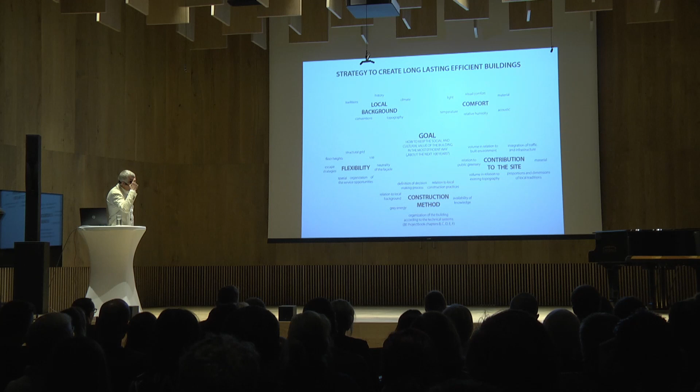The next is contribution to the site, which is also extremely important, because we don't believe, as is often done, that a project should only focus on its own success without considering that you need to bring value and benefit to the environment. If you don't do that, you will fail also with the project.

You need this contribution to the site, and that means architecture is not only design of objects, material, and volumes — it's much more. It's designing of relations. That's the very important thing.

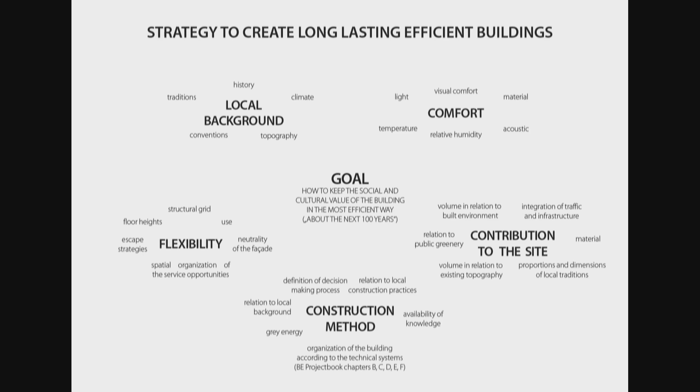Another thing about efficient buildings is the construction method, which means we have to think not only which materials we use and how we do it, but what knowledge we have on site, and what can we do regarding grey energy, which is an issue not considered in any norms in Europe at the moment.

I'll come back to grey energy later — what is meant by that is at least 13% of the life cycle of a building is influenced by the construction method and the use of materials, and its relation to the local background.

What is very important too is that it's not only about material and design — how the decision-making process is defined and how you reach a certain goal matters too. Nowadays things are getting more complicated because more authorities and more people are involved in the procedure, and you need to integrate them well to complete the process.

That's about efficient buildings. Now, how can we do buildings with low operating costs? What do we have to consider? How to reduce primary energy demand and CO2?

First, we have to look at the climate and design our building according to local circumstances. What we try to do is develop our buildings always in relation to climate factors on site first, and then to building optimization parts like window-wall ratio and operable windows.

These are all factors which will influence the efficiency of the building. These are more technical factors you can see here, the technical systems. They are only one small part, energy distribution and energy conservation. Technical systems are one part of this.

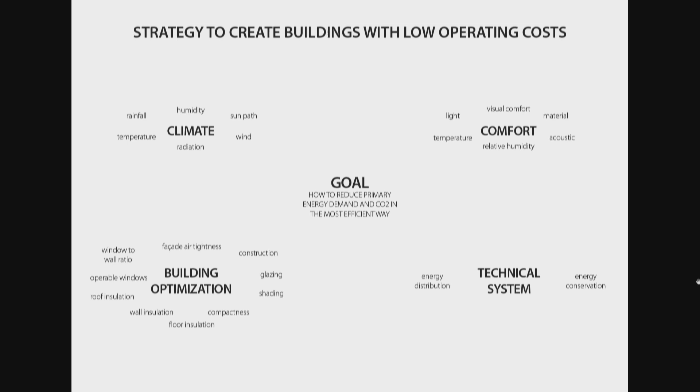We don't think that the technical equipment of a building will solve the problem of reducing CO2 emission for the future. We don't think so. And once more, comfort is one of the factors which will influence achieving this goal. Now, I'm coming to the examples.

Contribution to public space, that stands for the 200 years issue. Structure means our building needs to sustain at least 100 years structurally. The building envelope has an average lifetime of 50 years, the function about 20 years, and the surfaces, meaning decoration and things like that, about 10 years. I will illustrate that with the next slides.

When we approach a project, that's one of the first things we try to face: how can we implement our building in the best way to create not only these issues, but also a certain relation between the different parts which already exist, so we can get that value-added project in the end.

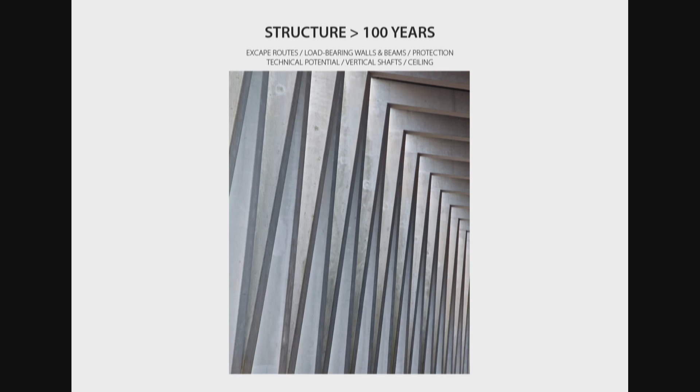The second is to look at the structure, which means we need to find ways to organize the escape routes, the load-bearing systems like walls and beams. We need to look at protection, the technical potential, meaning the flexibility of the structure, the vertical distribution, and ceiling heights. There we can define the ability of the building to bear different functions.

If we do that in a structure in a good way right from the start, thinking it's not only there to be a residential house, but it can also be a commercial house, or a kind of church, a religious place, then we think a little bit different than if it's only housing where we just say, okay, clear height 2.50 and it's done. We have to face that we should go a little further than that.

Next thing is building envelope, 50 years: roof, windows, shading systems, and materials which we use outside. But the building envelope is also influenced by the technology we use inside the building. We have a method within our office for how we work on projects right from the beginning. One is that in combination with the facade and the expression of the building, we think about how we use the technique inside, because these two things are in a very strong relation to each other.

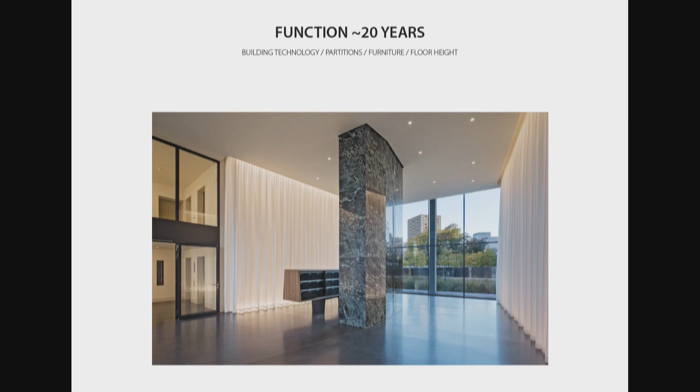Next thing, function, 20 years. Probably it's a little exaggerated, but our experience is that the life conceptions of the users are changing quite dramatically already nowadays, changing every 5 years. We are strongly influenced by a very fast communication between ourselves now, and I think this is a very important fact.

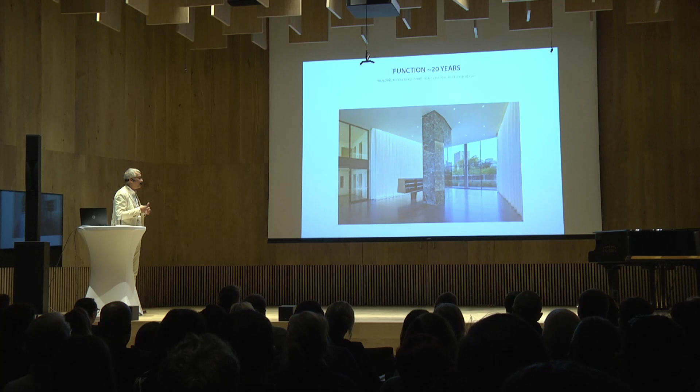What we can also see is that it's necessary that functions could be changed, even if it's not absolutely something we have to see or want, but it's a fact which happens. In old buildings we investigated, that's learning from the past, we could see that when we look through their lifetime, at least they changed their function 3 or 4 times. It was not only residential, or it was residential in different forms. We have to look at this, that we can work with this issue much more than was done in the past—that means flexibility and a certain neutrality regarding the buildings.

And surfaces, that's the last part: decoration, walls, lighting, floors, atmosphere, everything which creates atmosphere within the building, and doors. These probably have a much shorter lifetime. In the best case, the lifetime of these used materials is longer.

Now I'm coming to the first part. You remember when I spoke about long-lasting settlements and densifying. We think long-lasting settlements are nowadays a question of best use of the building land we have, and how we can create a better optimized use of square meters per capita.

Second is the volume in relation to the built environment. We need to think that our project is not like an autistic object. That's something we see very often in architecture nowadays, and we don't like that. We think it should look nice, it needs to be a beautiful building, but that doesn't mean it cries louder than the others. We need to set it in dialogue—that's a very important thing in architecture.

Public transportation and infrastructure, which is already mostly there, not only in villages but also in towns—we have to use the infrastructure we already have in the best way. If we extend it everywhere, it's like a cancer. We have to look at how we can limit things and use what we already have in the best way.

Now I'm coming to the first example. This relates to the aspect of density—it's a project built on the former Renault factory area in Paris. The client calls this building Ardéko, even though we don't see any Art Deco language in it—but he liked the project and wanted to give it that name. The interesting thing is, first, it has a very high density.

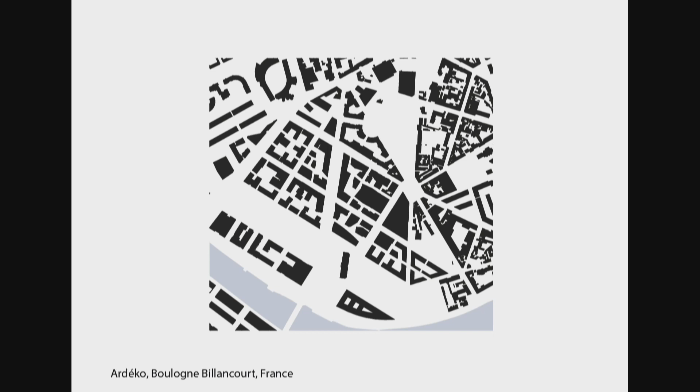In former times this whole area was the Renault factory, and now it's been turned into a master plan by Patrick Chavannes, into a residential area. Our project is located here—we were invited to a competition and designed this slightly strange shape, which results from different requirements of the master plan by Patrick Chavannes.

One requirement was a big boulevard. Second, he wanted a clear possibility to walk through—transparency, not only here but also here, meaning big gates so you can walk through. He wanted transparency and walkability within the quarter, and other rules which resulted in a very strange shape within the building itself.

But the important thing when I look at this plan is, first, it's part of the city.

It's part of the city of Paris. And that's what we learned. We looked at Paris, and then we tried also to use the language, the material, and a little bit of the spirit we caught in Paris, and what we did is extremely well accepted. Paris is one of the most visited cities in the world. And why? Because there is a certain relation from the building to the public space.

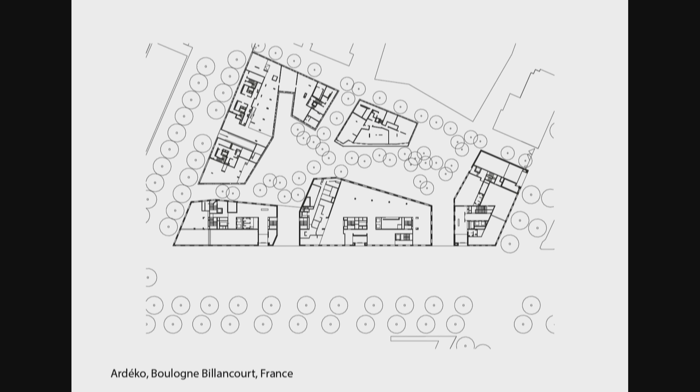Not only that, it's also the material and the expression of the buildings. If you look at the buildings, not every building speaks in a different language. They are made in a homogeneous way, done with the same material, with slight differences between the different buildings. And they have a common use of commercial areas on the ground floor. This is one of the things which was very interesting.

This wasn't proposed by us; it's also the client who understood this was necessary. We had commercial areas on the ground floor - this is a big restaurant or canteen, and also these areas are dedicated to commercial uses. So everything here is commercial use, and here is a kindergarten, and this is also a commercial area. Everything above in this part is the residential part.

We only made the outline design of this building, and then the building was given to another architect, who fully designed it on his own responsibility. We only followed him. We were, let's say, the master planners for this block, but we only had dialogue with him about his project. And the influence was quite interesting because now...

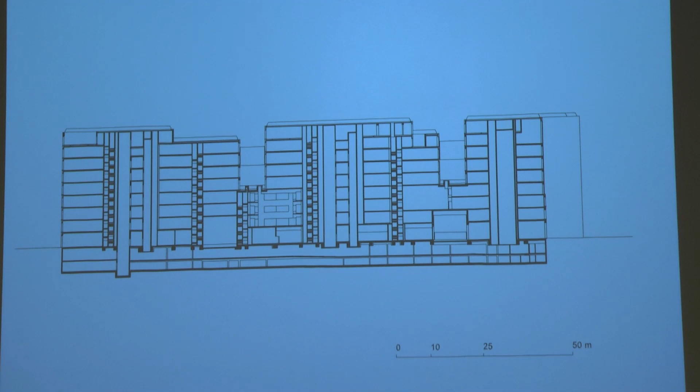I'll keep that for later, I want to show you something else. What is interesting is the material of the building. We proposed natural stone - a clear, bright natural stone, which is very familiar in Paris. It's like their language, the vocabulary they use, and we used the same vocabulary.

Then the project, which is social housing, was on the opposite side. Their client said, okay, we cannot do anything cheap, I don't want to be the bad guy within this master plan. And I said, okay, we'll take a little bit less thick natural stone, but we still take natural stone, because he understood it's about a relation, a dialogue between our project and their project. That was the real big thing which I liked very much - that it was not only about formal issues.

I'll go back now so I can show the things before - this was the ground floor. What else we created is an interior court. What you cannot see here - this has to be left free for the kindergarten - but everything else was planted, or is planted, with trees, forming a kind of tree canopy, really a covered area made of trees. And if you look from the top, you are looking into a little garden, like a little forest. That's an idea we liked very much.

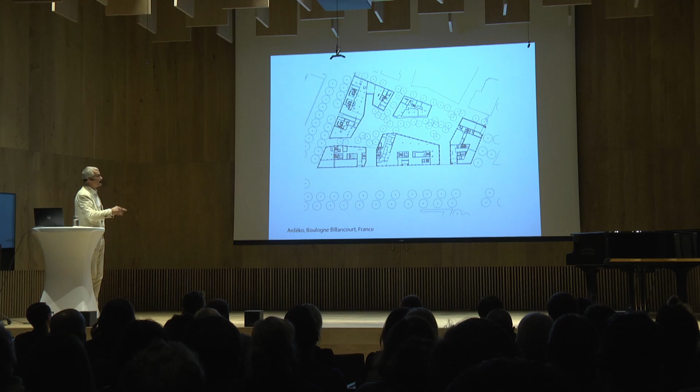And here you can see this transparency. The very big form we have is divided into 3 volumes. Why 3 volumes? Because then we can have access from each of them into different big halls, and we can manage them as 3 independent units, or use them as one big unit. That's what I'm talking about when I say open buildings.

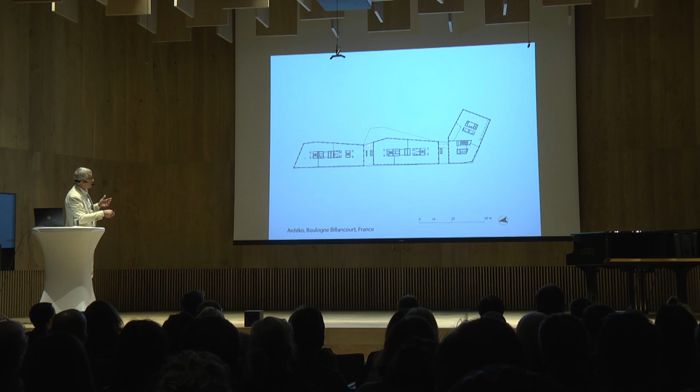At the same time, this is not only a dense project - we made around 30,000 square meters of gross floor area on 4,500 square meters of ground floor, so it's quite dense already. But we managed it, and on the upper floors the form gets slimmer, and at the same time there are no load-bearing areas around. So you have a big kind of flexibility, and we showed the clients how he could implement housing, residential units, flats in the future if necessary. That's the interesting thing about the project.

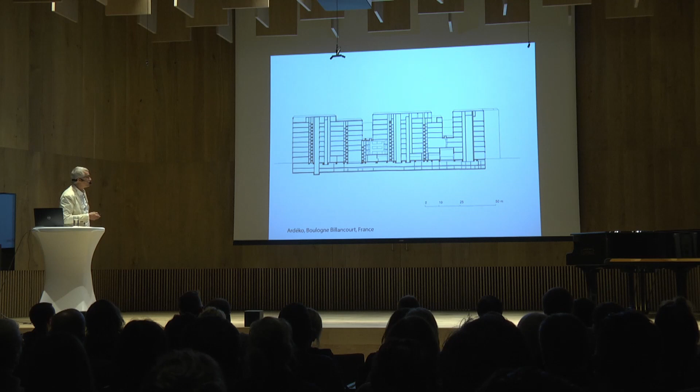This is just about the shape of the building - it's not just one big block, but separated. That's the entrance hall. Here we can see it from the back. On top, down here is the restaurant, the terrace, and above there is another terrace. This strange shape follows the regulations given by the master plan from Patrick Chavannes, because there were different distances to keep and things like that. In the background you can see the other project, the housing project.

They also made use of this, because that's something we said: the vertical window is the language of Paris. Everyone who works within our plot has to use this too, and that's what they did. Their proportion is a different one, but nevertheless they used the vertical proportion, and now it's like a melody or a harmony and its variation. It's the same thinking behind it, but it's very necessary to do so and to have a common understanding.

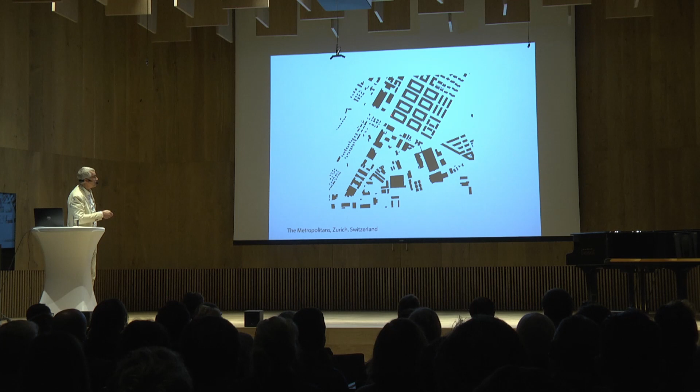A different form of densification is the project we did in Zurich. It's not in the direct center of the city, but very nearby the city center. The Metropolitans are 2 towers, you can see them here, and the density here is the same as you can find there. The project was about big problems with noise emissions, but a very fantastic view, and therefore we created this high-rise project.

The interesting thing once more is the common area here: 2 entrance halls, 2 cores, 1 common area as a public communication area. And it's not only that the residents of the project will come here, but also many others are participating in this common space.

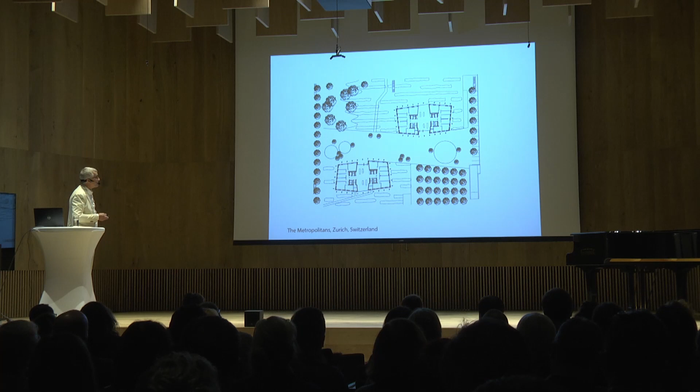Then the layout of a standard floor. As you can see, very simple organization: 1 core, 1 flat here with double orientation, 1 flat here also with double orientation, and another one, quite exciting, which goes through like that, profiting from two orientations. A quite efficient thing.

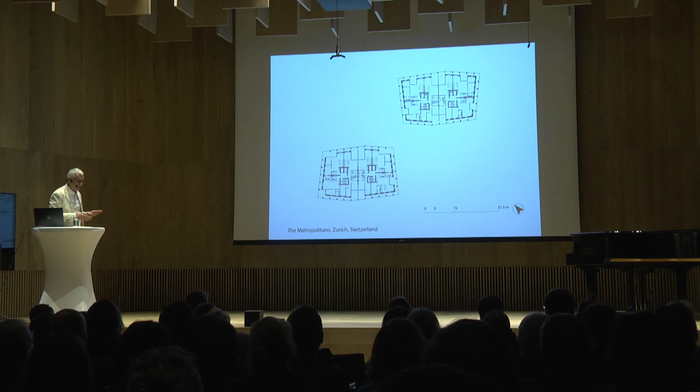The interesting thing about this too is how we can make it so they have interesting private outdoor spaces. What we proposed is to create a very deep facade, and within this deep facade to make loggias, to integrate them, not just as an annex like balconies, but really a zone running around, protecting the whole facade and also the private exterior places.

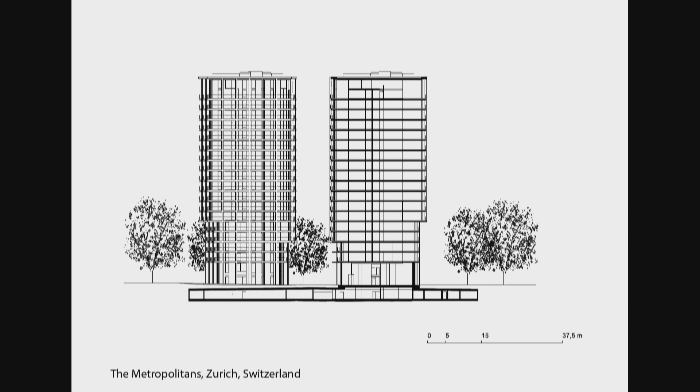I think 16 levels of standard floors, with a double-high floor on the very top, where there is a common area, fitness and things like that, for all the residents in the house - an area they can use together. And here on the lower floors there are services, entrance hall, and things like that. Nothing special.

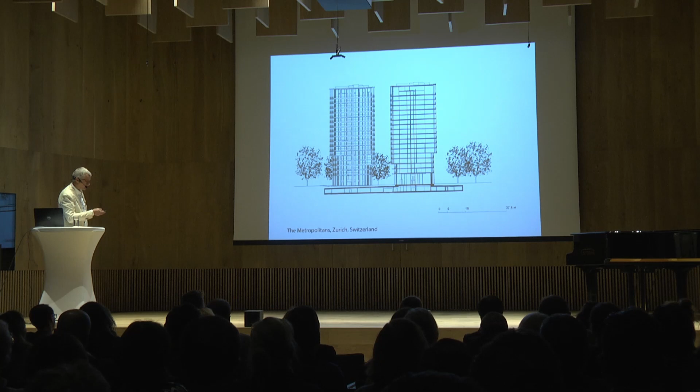But a very expressive building, a very simple construction, but at the same time a very solid and very performant idea. You can see here it's sheltered in the background a little bit with panels, cladded facades, and everything here is made out of prefabricated concrete, but in a very perfect, Swiss way.

Entrance hall - as I said, we have here also a double-high space, but other parts are already used for flats. So we have this different use, and on this part of the ground floor there are services used by the inhabitants of the tower. Here's another one.

Then the last one about densifying: this is the project which is now under construction in Brussels. It's a competition we won 2 years ago. It's about the Belgium headquarter of the Banque Nationale de Paris, BNP.

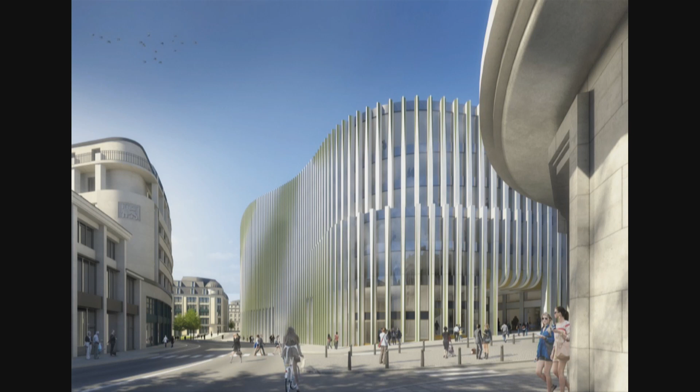It was a long discussion within the organization, should we do it or not, because before there was a huge bronze-cladded high-rise building here. But the location is very interesting because I'm standing right in front of Victor Horta's Beaux-Arts building, which you can see here on the right side. This is the Galerie Ravenstein, also a very famous building. Down there is the Shell building, and up on this side is the Royal Castle. So it's really in the center of the city.

What we tried within this project first was to create a high density to profit from this extremely good public transportation. The main station is only a few steps away from here - you can even pass through the Galerie Ravenstein, it's a 200 meter walk, and then you're already in the main station of Brussels. So that's a very interesting location.

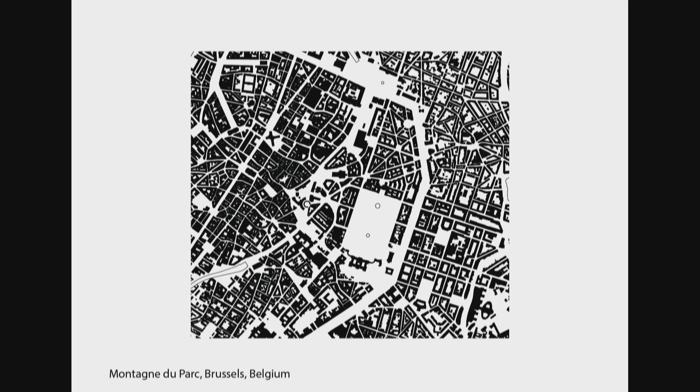The location is this here, what you can see: this is the Rue Royale, this is the Palais Royal, and this is the Dutch Shell building, and here is the Victor Horta Beaux-Arts building. So a very prominent location, and here there are also classical fin de siècle architecture buildings in tremendously good shape. So we were not allowed to touch them, and it's already part of the headquarters from the BNP, but they wanted a new building up here.

What we proposed is, let's say, a very low structure. So we took away the whole high-rise building, even if it would have been possible to do another high-rise. But we said no, we want to stay within the horizon of the city.

So we don't want to get out of the landscape. What we wanted also is to create interior courtyards which were not only for the profit of the users of the building, for the bank itself, but on ground floor, which is fully equipped with commercial areas, people can also benefit from the interior garden areas. This is one of the very important things within the project.

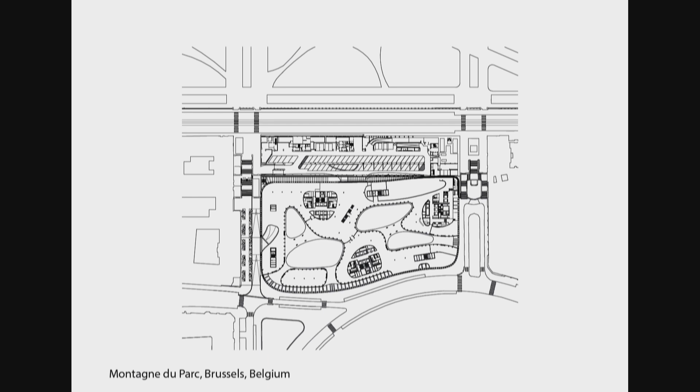Another important thing, you will see later, is that we have a height difference from the Rue Royale to the main street we face with our project of 12 meters. So within our project, we have to master this height difference.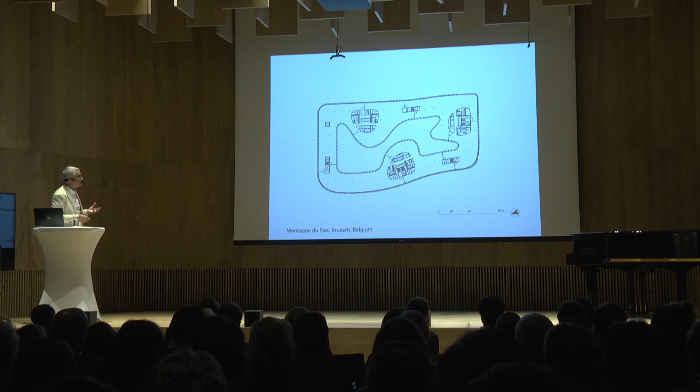The very interesting thing in this project is that we have 3 main cores, only 3 main cores and 3 escape routes. But beside that, we have a very open surface which can be used in an extremely flexible way. This is also part of the open building issue, and here you can see that we have also a large amount of exterior area in the upper floors.

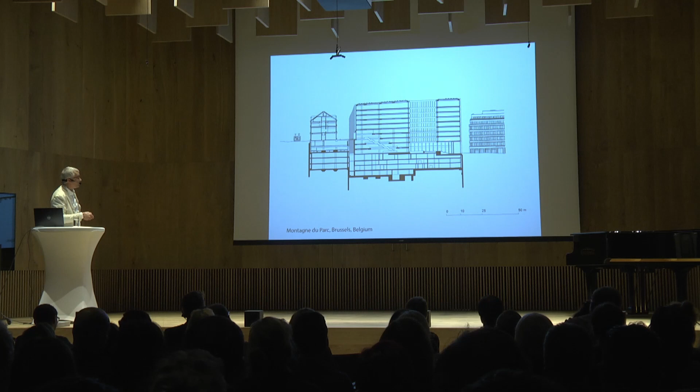That's what I said before, the area where we have to step up these 3 floors, and this is the existing building from the bank, which faces the Rue Royale. And here you can see a little bit, no, that's the Galerie Ravenstein, because Victor Horta's building is hidden a little bit behind. But what is also the idea behind this?

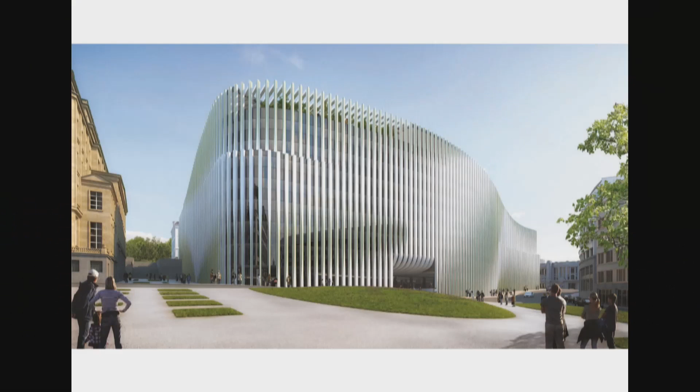Here you can see the Victor Horta building right here in the corner. And here the other building is the one where BNP already has part of its headquarters. And now what we tried is to make an architecture which is more abstract and which integrates in a very different way, not adding another conventional classical facade with openings and closed parts.

Instead, a more homogeneous movement within the city, like an art piece, let's say, which we add and which is also at the same time closed and transparent. And what you can see, these green effects on the facade, that's not only Photoshop. You can see already the concrete pillars, which are prefabricated, each of them, and they have a special form, and they are really done that way.

And it's concrete, which is then treated. It's a kind of green concrete inside, and we treat it in a way so that it's really getting a green and white surface at the same time. And then you get this very special appearance of the building, as you can see it here.

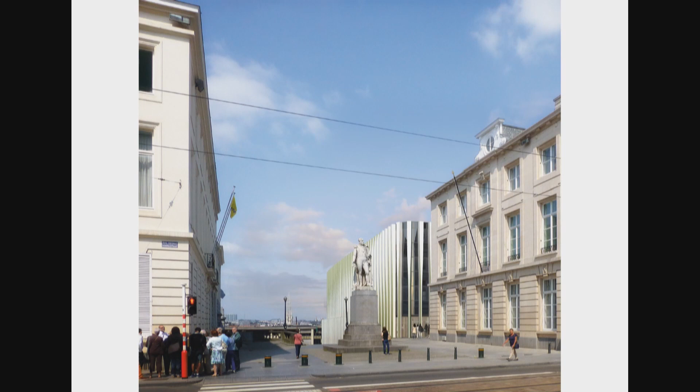And here from the backside, view to the city, where it stands here, there was like this, the former high-rise building. And here you can see that's the existing building at the moment, which is still part of BNP Paribas. So next part, second one of 3, then I will follow with the part about resources.

Open buildings. When we talk about open buildings, what does it mean? First, spatial organization of service opportunities. How can we implement different functions within the building itself? What kind of structural grid or floor heights do we implement so that we make it possible to integrate different needs and different life conceptions, so that office can be integrated, residential, commercial areas, co-working areas, whatever you can imagine should be possible and not avoided. You need to force it, so that things can be changed.

Vertical organization of the technical installation efforts, how to keep the efforts low to make different use possible, you need to keep these efforts as low as possible. And you have to optimize the facade so that you can also make partitions wherever you want. And all these challenges are quite difficult to fulfill.

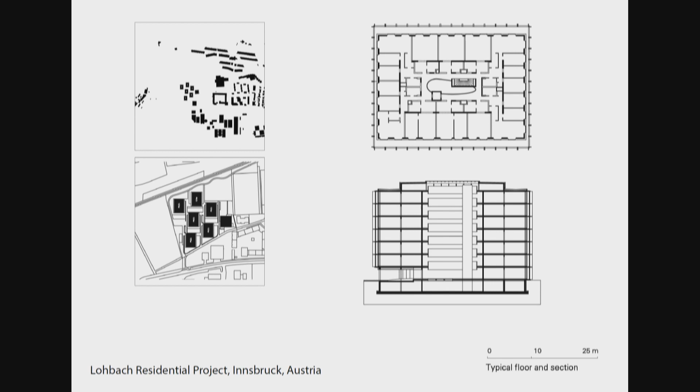And then we are able to manage, in the most efficient way, 10 apartments per level, but only one stair, one elevator. And that's a very efficient way.

Then we make a very simple shaped shell envelope all around, and then we have these private areas. The private areas, according to the orientation, are wider in some parts and less wide in others. But you can step out everywhere. So the construction of this inner shell is everywhere the same.

We have just these parts that are bearing, this one and this one. All the rest is open. You can tear down all these walls, and you can really be very flexible in organizing new and different apartments.

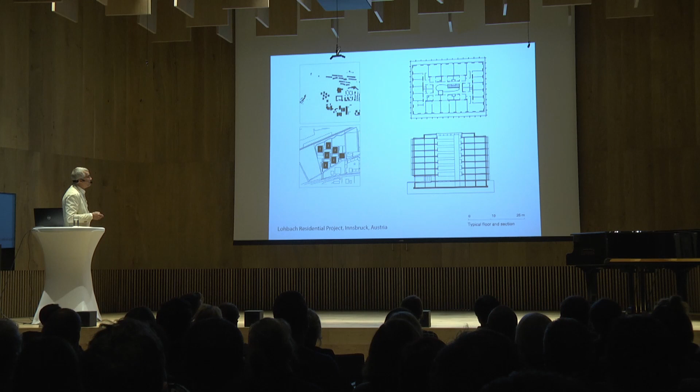The big effect of this was that the client was so satisfied after 3 or 4 years that he said we should now build the second stage of these, because the acceptance from the residents was quite high, and there was practically no fluctuation. The people were used to it, and it's a huge developer, the Neue Heimat.

They own more than 30,000 flats in Austria, so they know what they are talking about, and they say they have the experience that this is one of the best projects they have at the moment in their portfolio.

And then they decided, yes, we will go on with that. Another thing which was extremely important: the building was done within the budget of social housing, which is not that bad in Austria, I have to say. But it was only possible because we were very modest with the materials, with the surfaces. It was compact, and everything.

And we had the possibility then to make a special kind of shutters, folding shutters, so that everyone can arrange the privacy and the view on his own behalf. So he has really the possibility to express himself, or to choose complete closed privacy. And that's also something very important.

Very shortly, it's located over here, so isolated, but in a campus it's very clear you can construct your own identity. There it's really object architecture in a way. What we proposed, you can see here, different depth of facade in accordance to the sun inclination, and here a fixed sun shading construction, which we all knew—we didn't invent it all on our own. We learned from other architects who thought a lot, like Corbusier, who already did Brise Soleil, but we have to work with that and develop it further.

Another thing is that we have here completely neutral and flexible areas. Only here is the infrastructure integrated, and we have a very nice interior space with a big void and a central area—this can be separated, but you can also walk through. If it's separated, then it's the auditorium. If it's not separated, you can straightly go through, and you can also use the upper floors over here to connect the two wings. That's what you can see here, where you can walk over, and parts of them, like here, this small void. So spatially speaking, it's a very interesting interior design.

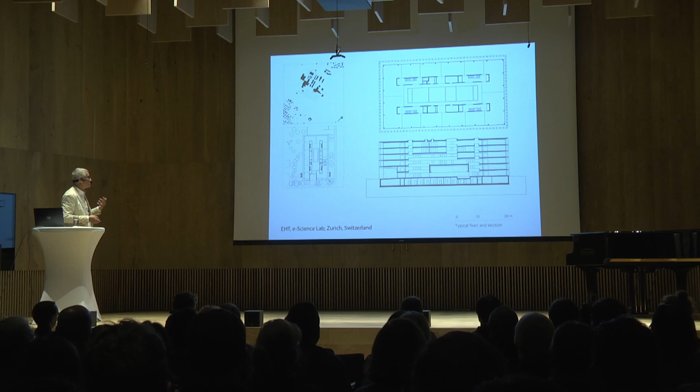And also the exterior design, which is done with massive travertine and with concrete slabs, so that we can get a very good sun protection for the whole building, as the problem in office buildings is not the heating, it's the cooling—so the most energy is needed for cooling. Here in this building, you need nearly no cooling because there is no exterior load, no sun is coming into the building. You can keep this out.

This is one of the images about the interior organization, and this is how it looks on this zone which is running through or around the building, and a little bit about the interior. Once more about the interior.

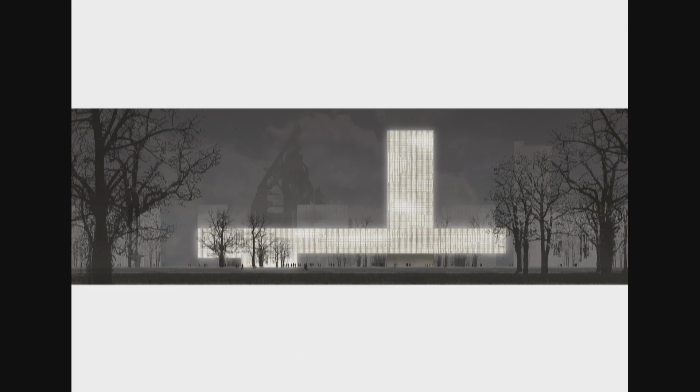Another one is the university in Luxembourg, which was inaugurated before last year, and this was the design from the competition. When did I—it was 2008. That was designed, and then it was a long history around.

Here in the background, you can see the—that's for doing the Hochofen, it's where you're making steel production. Steel production unit is behind, and what you can see here is the Dexia bank. We only made it very subtle, let's say, softly, so that it's not so much in the foreground.

But our ambition was—because the program is just this, the whole program we did within the competition was this one—we added the volume because we said, in a university, a public service should not be rated lower than a private bank, never. We said we want to have at least the same height, or even be higher. And that was our ambition. We had to do that within the same budget. The budget was given, it was limited to 72 million euro. And we said, okay, we do everything here, we do also this, but only here core and shell.

Not anything else, not the finishings inside. And we were, at the end, inside of the costs. That's the nice thing about it.

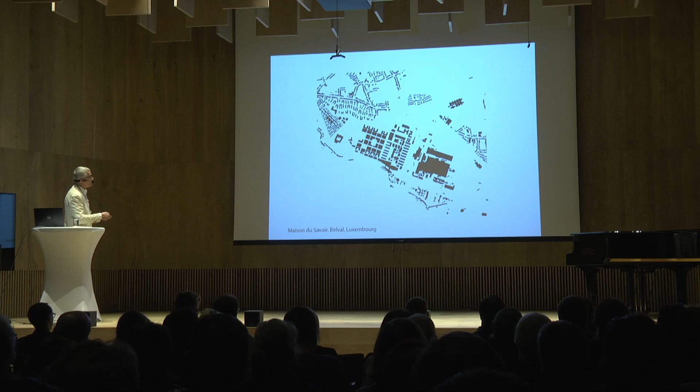So where is it located? It's in Belval, in Luxembourg, and our project is this one. All these things you can see here around are part of the university, which is slowly being developed now, and already decided by competitions. But at the beginning there was nothing. There was only this old factory part here, which is now under conservation, and the Dexia Bank, which is this part here.

Okay, here a little bit about organization. This is the building with the auditories and seminar rooms, like the infrastructure building for the whole university which will follow. And here is the Mensa.

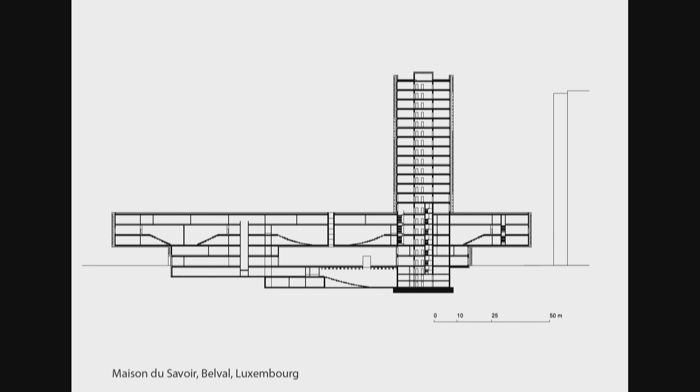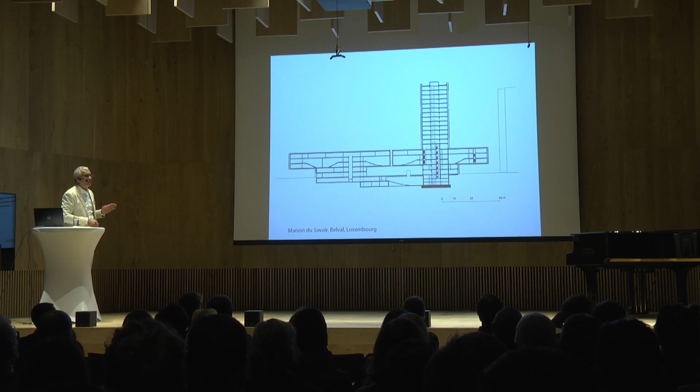And here you can see a little bit about the construction. The nice thing is, first, inside here, only underneath these areas is there a little bit of technique for ventilation. Here inside, no ventilation at all, no mechanical ventilation. That's a very interesting thing, because to our knowledge this was one of the first projects in Europe without mechanical ventilation for high-rise buildings.

And what you can also see, and this isn't just a joke, we made a second layer of facade, which also serves for protection, for sun protection of the whole tower and building. Otherwise the loads from the sun would be far too big.

Another one, and some special things about cantilevering parts and public areas, which are quite nice in relation to the existing parts of this old park. Inside, how it looks, and this is the conclusion of 22 to 26. That's now probably the more important thing.

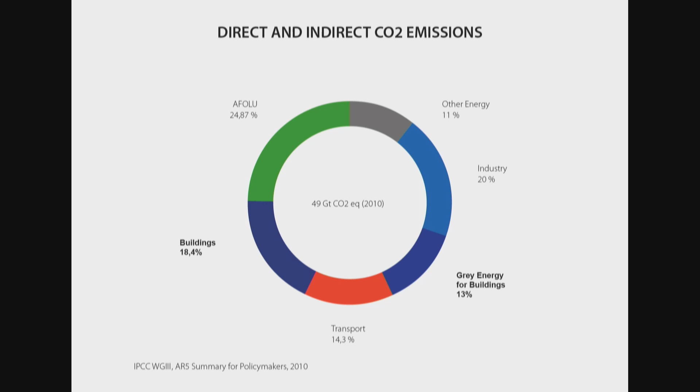We have to face the fact that 31% of the overall CO2 emission is dedicated to buildings, 13% to gray energy. That means for the erection, transportation, building site, doing the building, and then demolishing and removal of the building - that's 13%. The other 18% is for maintenance, heating, cooling, ventilation, and anything else necessary to keep the building running during its lifetime. 31% of the overall.

So that means the challenge for us is this, which we have to face, and we don't know too much about at the moment because the norms don't refer to that. We're only treating this issue, but already tackling the 18% is a big thing. That means we need to keep the maintenance costs and the demand for energy down. Otherwise we will fail to reduce the amount of energy.

Second thing, I'll skip that, just to mention that housing costs in our areas are rising much more, and the average income is not following that. So the gap between my income and what I have to pay for housing is getting wider. Now in Switzerland, nearly 50% of the salary has to be paid if you have rental flats, and that's enormous. So that's another thing we have to tackle.

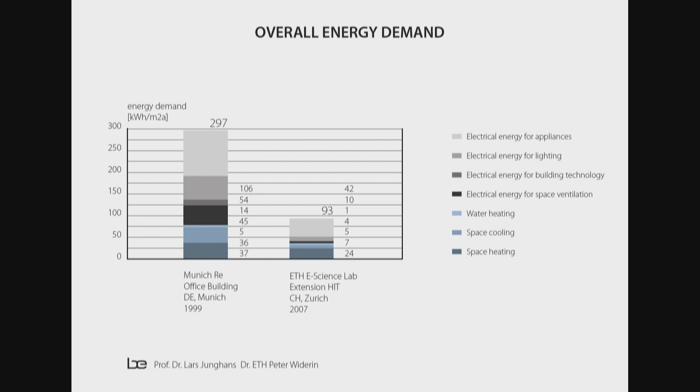Overall energy demand: the ETH building I showed you before is going down to 93 kilowatt hours per square meter per year. So that's already not bad, but we think this needs to be improved much more, and this can be done. This is a building, how it runs at the moment according to standard.

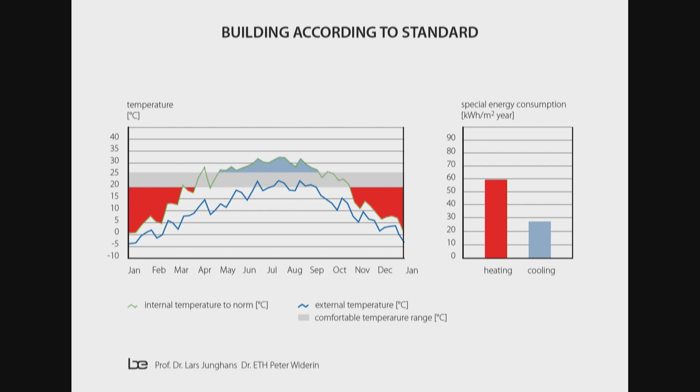What does it mean? You can see here, that's the external temperature. Here in gray, you can see the comfort zone, which is between 22 and 26 degrees. That's the gray, and then you can see we have a problem. This is the interior temperature if you don't do anything inside a building. And then to come into this comfort zone, you need to heat in winter. You need this energy, and in summer you need energy to reduce the overload of energy which is inside. And that means you have a large demand of heating and cooling energy.

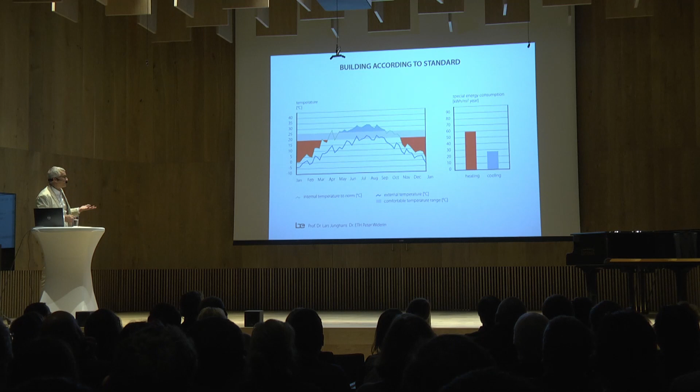Now what is happening, and what you are discussing at the moment, is we are optimizing the buildings, which is great, because then you can really go down with your heating and cooling demand, through better insulation of the shell, better technology, recovering energy which is used inside, and so on. But still you need systems for heating and cooling. That's the big thing, because you have to pay the installation, make the investment, and use the surface for heating and ventilation units. All these things cost enormous money. But not only this - if they recover energy, you first need electric energy to make it run.

And where does it come from? It's not down from Earth. You need also infrastructure. You need to invest gray energy to produce these facilities which enable you to ventilate, to cool down the building. And all these things are not taken into consideration in an appropriate way.

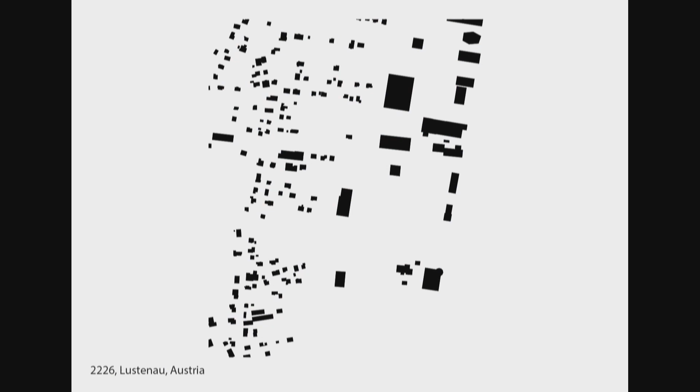So the 2226 Lustenau building has its name because we try to solve this problem of maintenance and of energy demand. The project itself is located, it's in here.

It's not a very interesting area. It's in the neighborhood of a village. It's more like an industrial area, I would say.

And it's not really interesting, but the interesting thing about it is first the shape, and the thinking behind it. Also the method which we used for this building is not only applicable under these circumstances. We can also do it, I would not say anywhere, but in most cities in Europe, within these climate conditions, it's possible to do such a building.

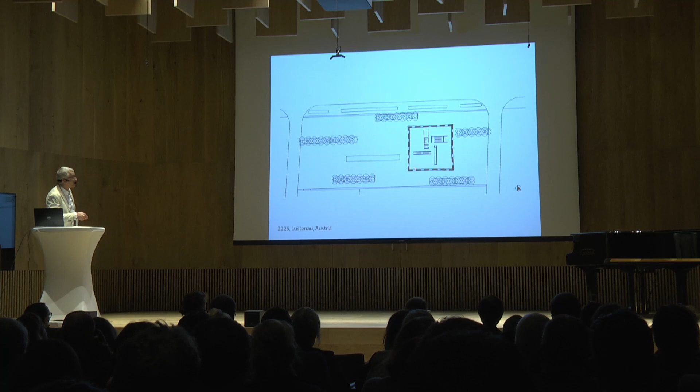First issue, it's an open building. We have this central core area, but around it you can do anything you want. That's one thing. It's compact.

Here you can see a little bit closer, and you can say, I close here, here, here, then I have 4 independent units, or you can say, I leave it open, as most do at the moment, and then I can walk through, and have this promenade architecturale also in my little building, and everything is kept together. It's about 24 by 24 meters in this kind, and 25 meters in height.

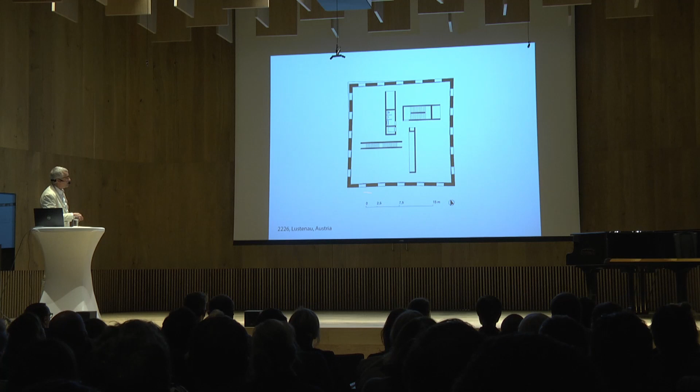Here you can see we have 5 standard, more or less standard levels, and a little bit higher floor, 4.5 or 4.8 meters at the ground level, because we have a different understanding for the use of the ground level. We think the ground level should be dedicated to more public functions. Therefore, it's a little bit higher.

But you can see also here the shape. It's quite clear and a very simple shape. What we also made as a proposal, and it's appreciated, is some interior connection, because this is not the escape route, but that's only the possibility to have connection in between.

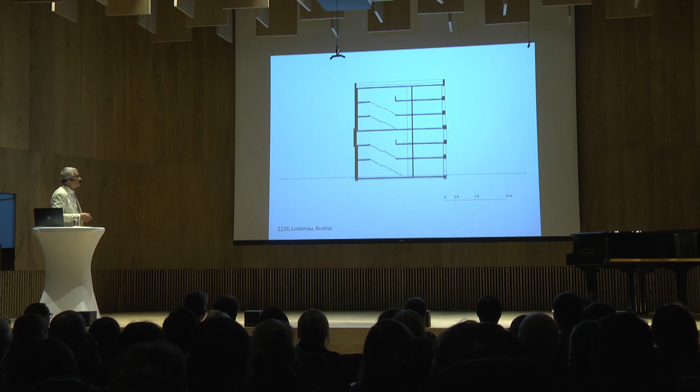These are the plans. The plans are very simple. The interesting thing is that this project works without ventilation, without cooling, and without heating systems. There is nothing of it inside. But the temperature inside the building, in winter and in summer, and really under extreme conditions too, is always between 22 and 26 degrees.

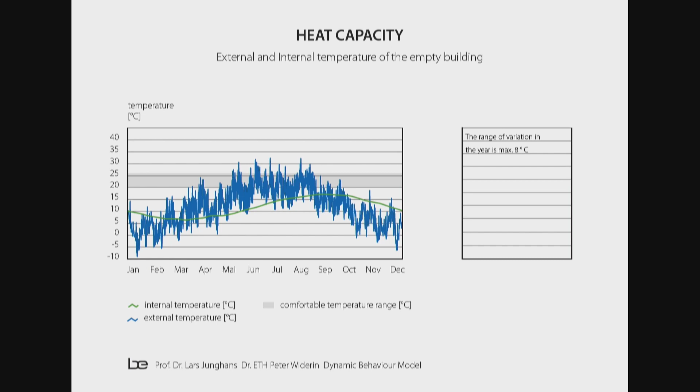What you can see here is our building, if we don't do anything. This is the exterior temperature, measured over the year. If you would plot it, it would be a nice blue curve, but here it's always day and night, so there's a dramatic drop, and therefore it has this form.

The second thing is the internal temperature of the empty building. If we don't do anything in the building, we measure it, and you can also do that with simulations. That's how the building would behave if we don't do anything. There are windows inside, no one is inside, it's the empty building. And the range of variation within the year is only 8 degrees Celsius. That's the first very interesting thing.

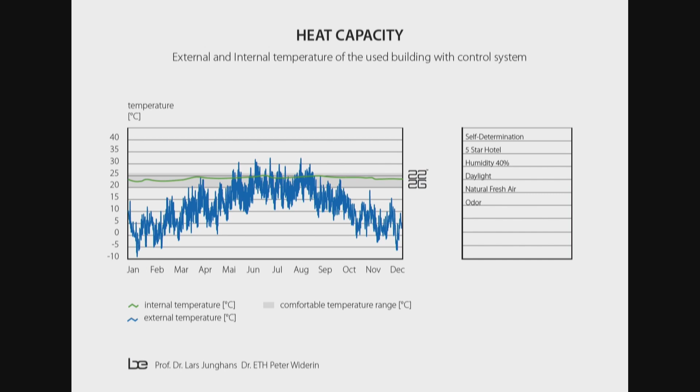Now, when we integrate our control system, you can see what is happening all over the year. That's the measured temperature within the building itself, under use with the control system and under these conditions. And I can assure you, because we have now experienced this for 4 years, that this is the reality. It's not something predicted, which specialists often have to do according to their norms and calculation models. It's something we live in, in that building.

We don't only live in it ourselves to be able to say it's perfect — it's rented out, because there are other people, other commercial enterprises inside, and they live within it. And we also now integrated on the very top floor some apartments, to show: does it also work for apartments?

And it works too. So what you can see, self-determination, you can open the windows and close them if you want. You can overrule the control system. Like in any hotel, you can interfere. In some hotels, the cheaper ones, you're not able to open a window because there's mechanical ventilation. You're not allowed to touch anything. But if you have the opportunity to do so, that's a nice thing.

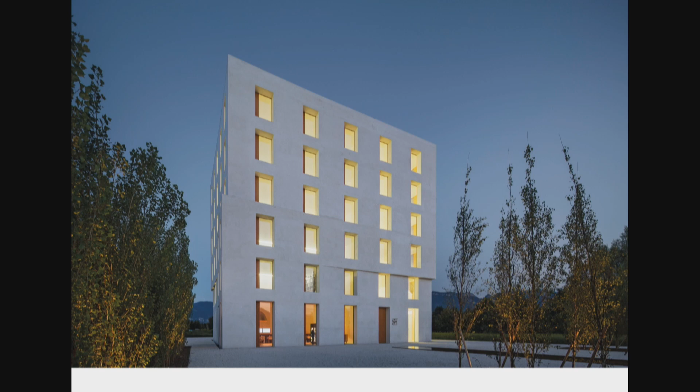Your humidity inside the building is very nice. Daylight quality is high, and natural fresh air is always given through the natural ventilation system we have. And the odor, the smelling of the building, is also very good because we only used natural materials inside. The building has no insulation, just brick—70 centimeters of brick—and a certain kind of plaster inside and outside. It makes a very good performance, not just in technical values, but the acceptance within the building is quite high. That's the aspect from night.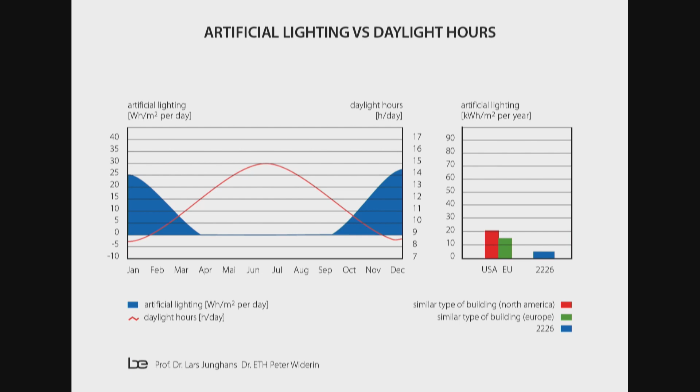But it's also about the percentage of openings on the outside, which is extremely important to understand how the building works. One of the secrets is that we use artificial daylighting, which is necessary in some parts of the year at a higher rate than in others. There you can see we have a good balance, and the energy we need for artificial lighting is extremely low compared to other standard values in the US or the EU.

And we use electric light mainly in the areas where there is less daylight. When there is less daylight, there is less exterior temperature, so it's necessary to make lighting, and then you can profit because it also gives energy inside the building. That's one of the issues which helps us a lot to get good quality.

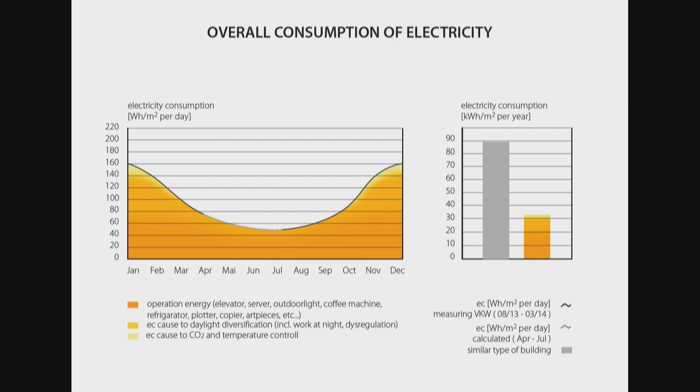Here you can also see the demand of electric energy consumption during January, February, March is higher, and also starting October, November, December, but going down very strongly during the summer months, because sun and daylight are available for a very long time. And compared to a standard electricity consumption, we have a very low rate overall.

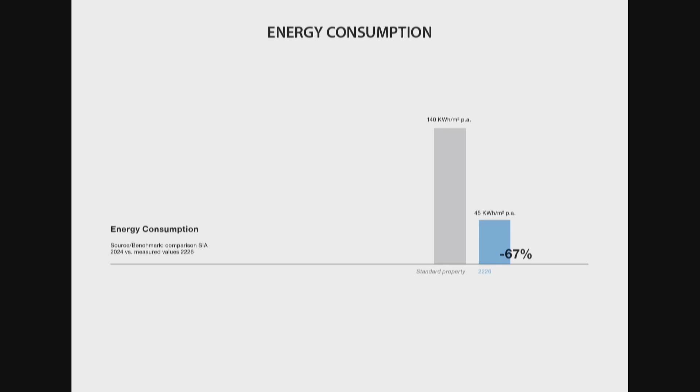The energy consumption—this is something we didn't measure on our own. The German Institute of Norms made a publication, a book about this building in comparison to two other very famous buildings they have at the moment in Germany. They said, we measure your building and then we will see what the performance is. And what you can see is the amount of energy which is needed now. Probably you remember, I showed you before the ETH, which was really at that time one of the most performing buildings in Europe, with about 90 kilowatts per square meter.

This is now going down to 45 kilowatt hours per square meter and year, so this is a drop down of 67%.

And that's also something I want to express. If we're talking about carbon neutral architecture, we have to say we need a social perspective for our buildings, but also an economic perspective. That's the target of our project: to show it's not necessarily expensive, but it needs an approach where the conscience of all participants, developers and architects, have to be newly adjusted. We have to rethink our method of approaching projects.

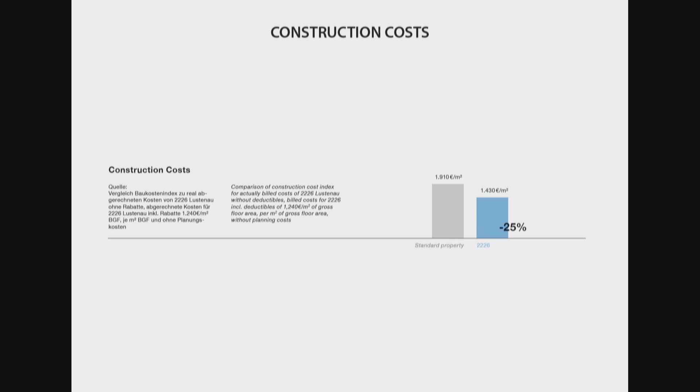And this is one very important thing I want to say to you: the life cycle costs. If we are talking about this, we are not only looking at what it costs regarding construction, but also regarding maintenance. And now you can look here what happens. It's really a big difference, and that's what is interesting for us in the project.

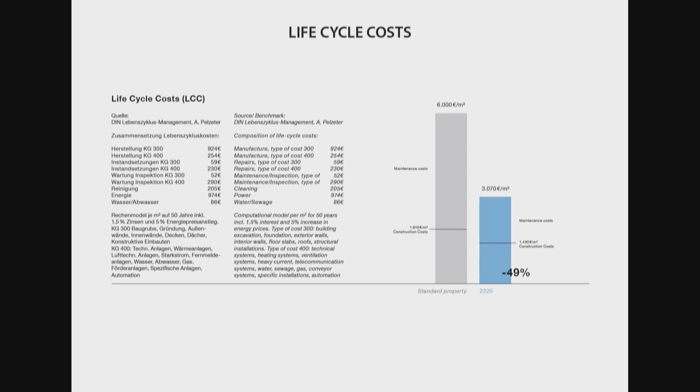It offers new perspectives and new possibilities, but at the same time, that's a big problem, because we are putting in question the technologies we are using right now. Most technologies, because what we are doing, we try to recover energy, we're doing anything else, but at the same time we are using a lot of energy to implement these systems.

What we say is to reduce the systems and invest in good management, a good operating program for the building, because that's something you need to know - when to open, when to close, how it may run, and there's a little know-how behind it. So it's not that easy to just make 70 centimeters of brick and the thing is solved.

It's a little more complicated, but it's a perspective, and we are now looking forward to doing other projects in Berlin, in Zurich. It's starting now, and people have understood it works. In the first 2 years, they said we don't believe it will work. But now we can prove to them it works, and we hope we are getting a step forward.